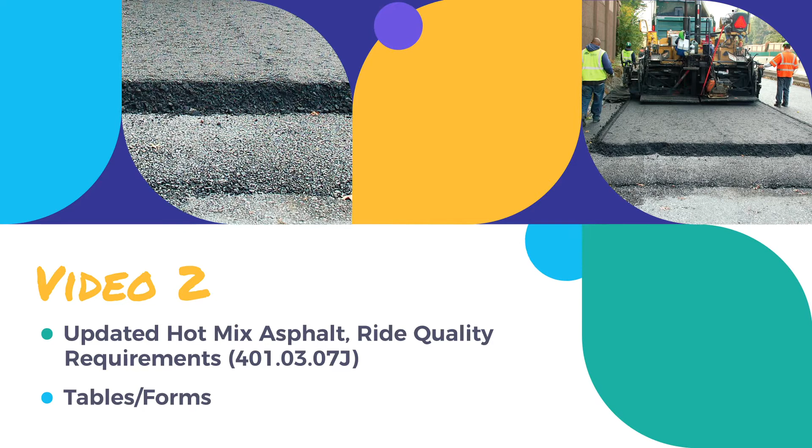In 2019, NJDOT released updated specifications for special provisions for state aid projects. This video series will review changes made to Section 401, Hot Mix Asphalt Courses. This second video in the series reviews the changes to Specification 401-03-07J Ride Quality Requirements. This specification outlines requirements and testing for the ride quality of hot mix asphalt pavement.

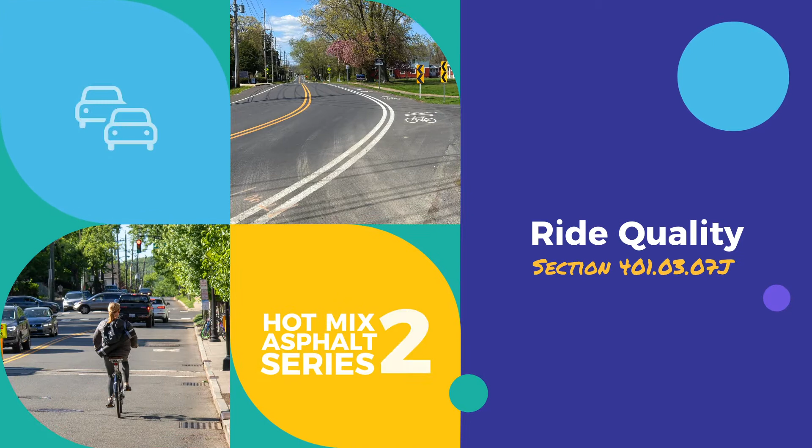The International Roughness Index, or IRI, is used to evaluate the ride quality of the pavement on National Highway System, or NHS, and NJDOT routes. This is in accordance with the American Society of Testing and Materials, Method E 1926. Pay Adjustment Equations, or PAE, have been updated.

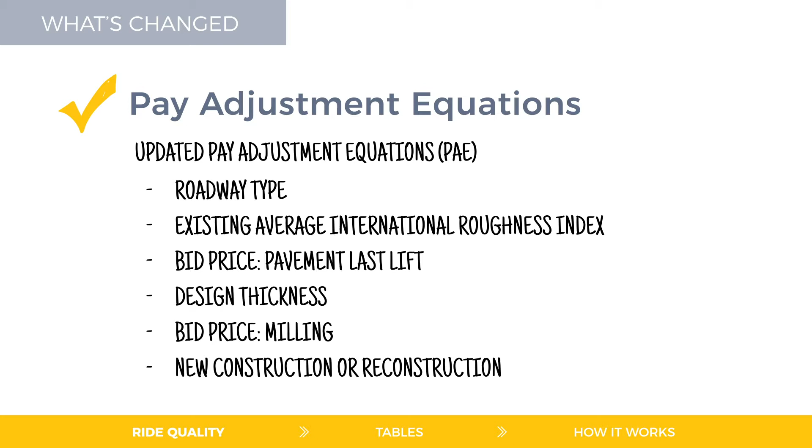PAE factors now include roadway type, existing average international roughness index, the bid price of the last lift of the pavement structure, design thickness, bid price of the milling per square yard, and whether the project is new construction or reconstruction. Any local aid construction project located on NHS or NJDOT highways must comply with all ride quality requirements from the PAE and Target International Roughness Index tables. All NHS roadways are listed on the NJDOT website.

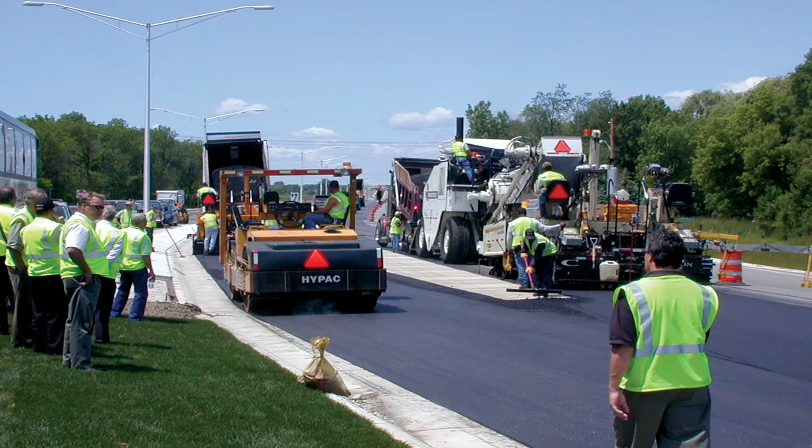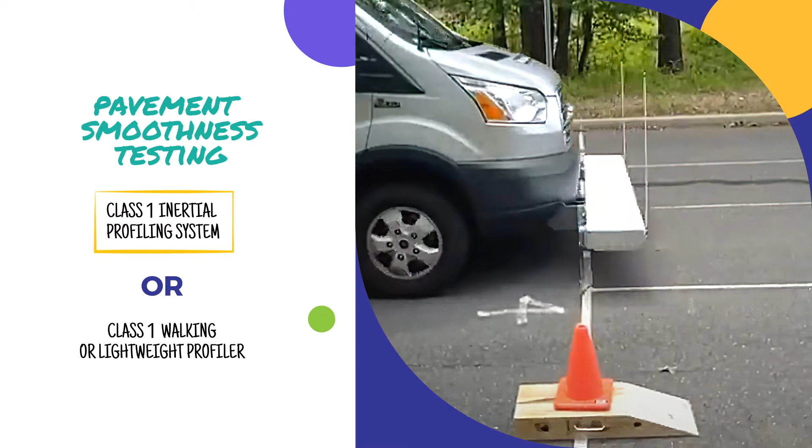15% of a state aid grant can be delegated toward construction inspection and material testing, including IRI testing. The final riding surface is defined as the last lift of pavement structure where traffic will be allowed. Pavement smoothness will be measured by testing the longitudinal profile of the final riding surface with a Class 1 inertial profiling system according to NJDOT R1. If project conditions do not allow for the use of that system, a Class 1 walking profiler or lightweight profiler will be used.

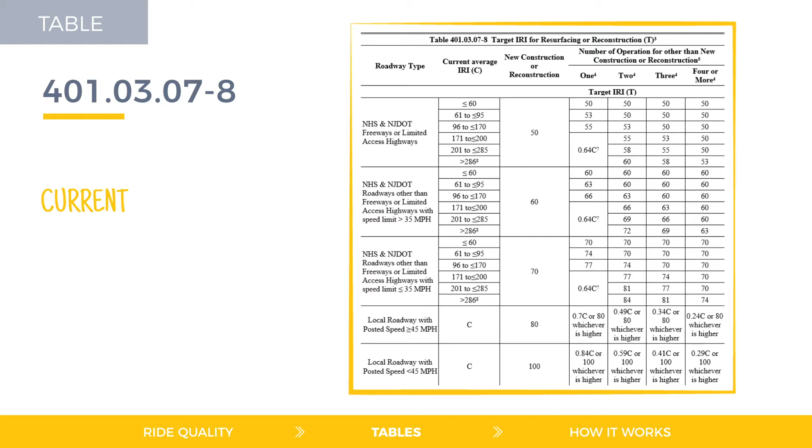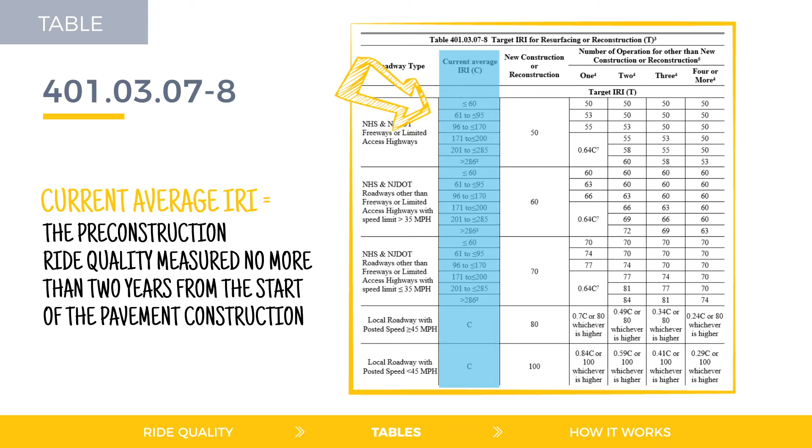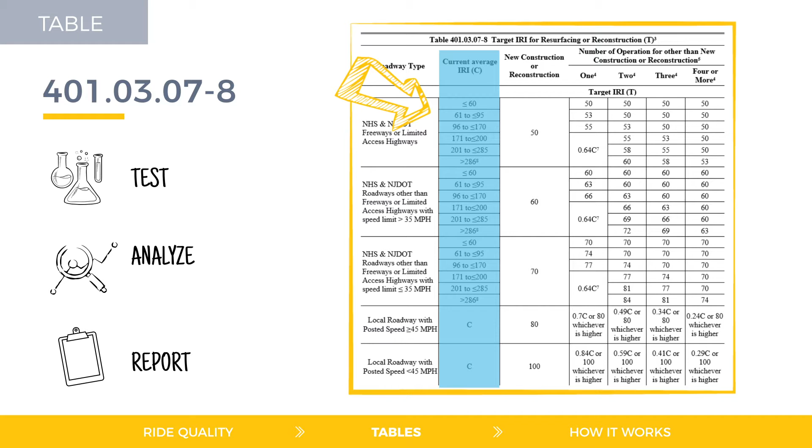The pavement will be evaluated using the current average IRI to select the target IRI from the Target International Roughness Index table. The current average IRI is defined as the pre-construction ride quality measured no more than 2 years from the start of the pavement construction. If the current average IRI is not available, the testing agency will test, analyze, and report ride quality before pavement construction to measure current average IRI. Pre-construction IRI data is available for NHS and NJDOT state highways by contacting the Highway Performance Monitoring System Unit.

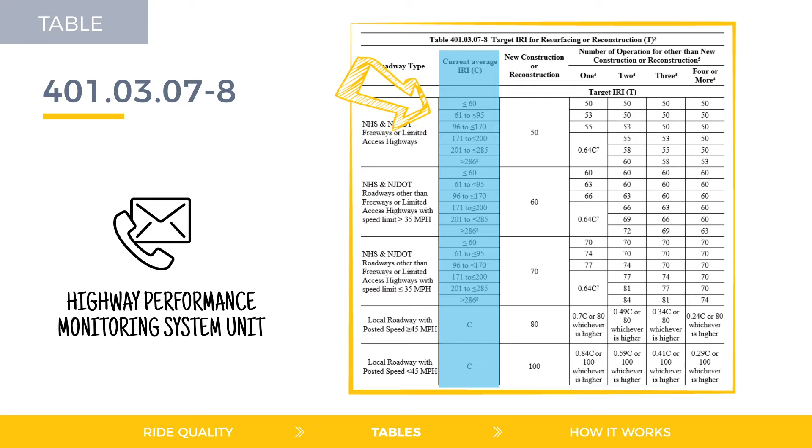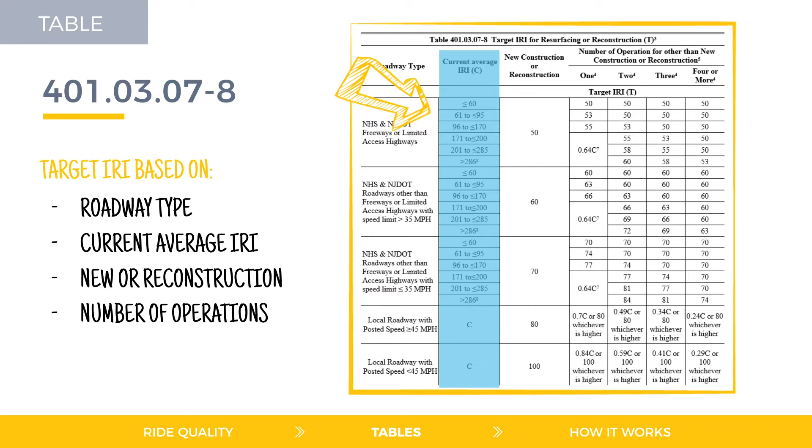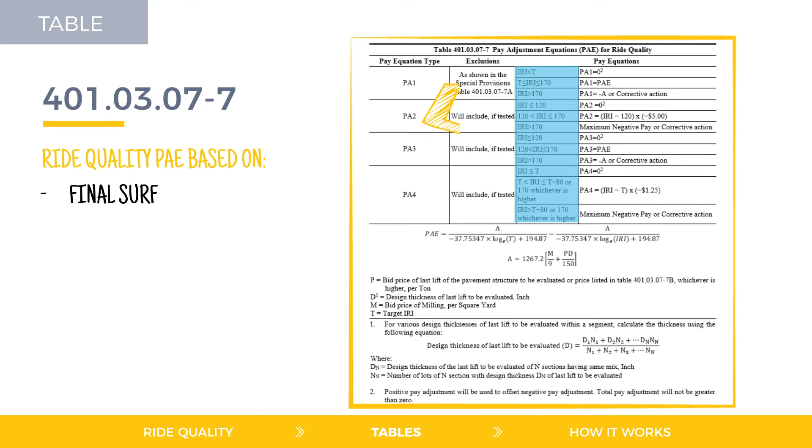Target IRI is based on roadway type, current average IRI, whether the project is new construction or reconstruction, and the number of operations. The maximum target IRI for NHS and NJDOT state highways is 84. Quality control testing should be performed during hot mix asphalt placement to ensure compliance with all ride quality requirements. Ride quality PAE are based on the final surface IRI measurement, target IRI, the bid price of the last lift of the pavement structure, the design thickness, and the bid price of the milling per square yard.

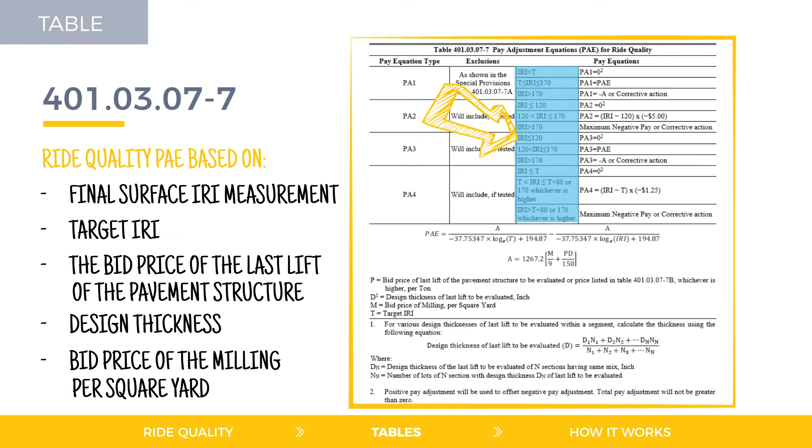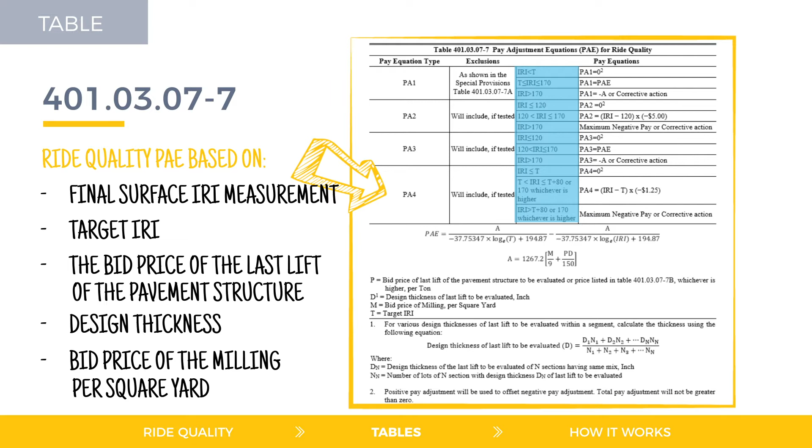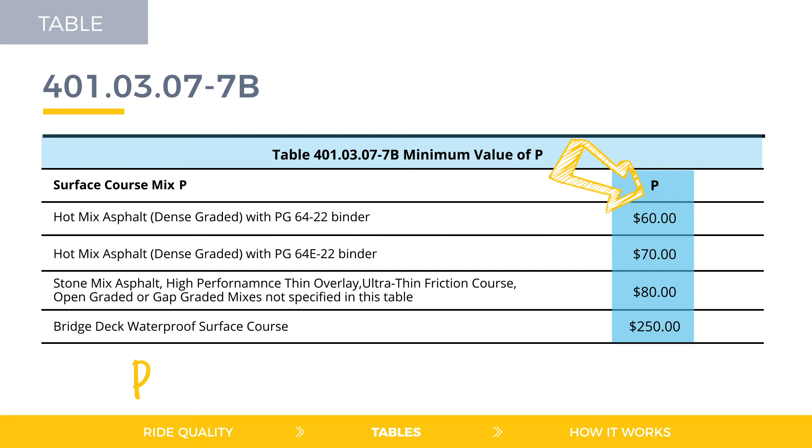The pay adjustments occur when the post-construction IRI is greater than the target IRI in PA1 and PA4 and greater than 120 inches per mile in PA2 and PA3. Table 401.03.07-7B gives the minimum value of the variable P, which is used in the pay adjustment equations. P is the bid price of the last lift of the pavement structure or the price listed in the table, whichever is higher per ton.

Different types of evaluation and PAEs apply to different projects on different types of roadways. In some situations, a visual inspection is enough, but in others, the measured IRI is necessary. If the municipality or county's field representative determines that the work may not conform to the ride quality requirements, the ride quality of the final riding surface will be evaluated using IRI. Visual inspection by the field representative is considered sufficient grounds for this evaluation.

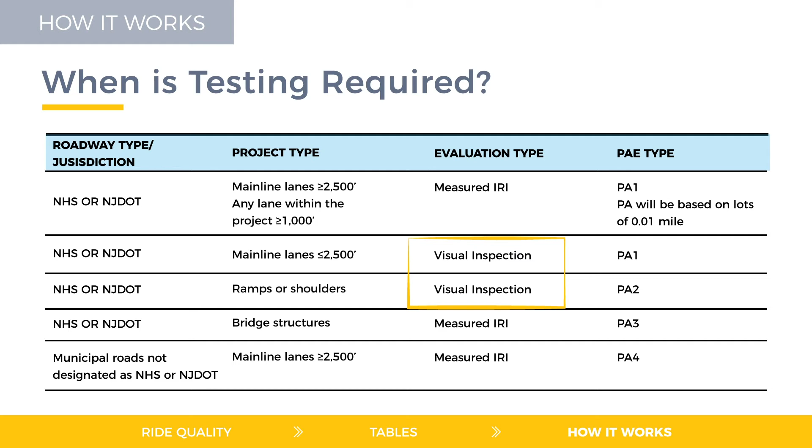There are three basic aspects to ride quality testing: preparation, quality acceptance by NJDOT, and, if necessary, corrective action. To prepare for IRI testing, notify the municipality or county's field representative when paving is complete. The field representative will request testing by an independent testing agency. Mechanically sweep the surface before testing and prepare the pavement.

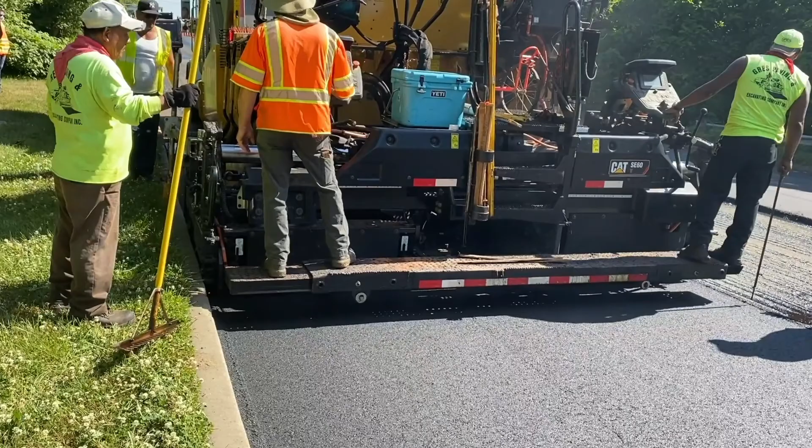To facilitate auto-triggering on laser profilers, place a single line of temporary pavement marking tape perpendicular to the roadway baseline at the beginning and end of each lane, shoulder, and ramp to be tested, or as directed by the testing agency. Submit the actual stationing of each temporary marking location to the field representative. The acceptable IRI for the pavement will be the target IRI from the target IRI table rounded to the nearest whole number, using the latest current average IRI data.

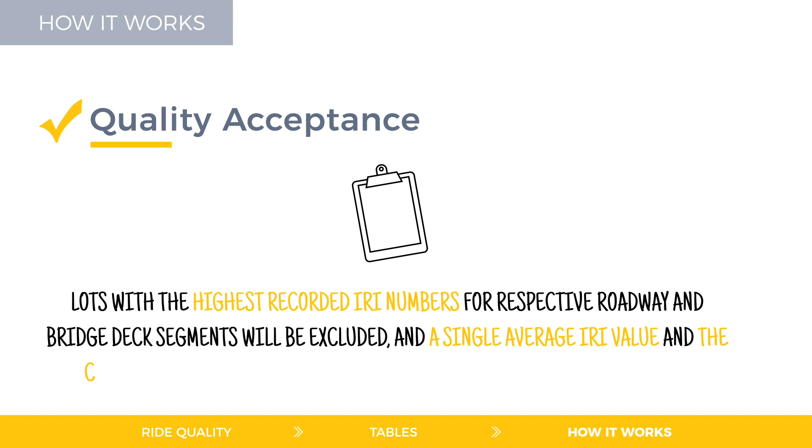The number of lots for final pay adjustment will be reduced by the number of lots excluded for each segment shown in the PAE table. Lots with the highest recorded IRI numbers for respective roadway and bridge deck segments will be excluded, and a single average IRI value and the corresponding pay adjustment for each 100th mile lot will be reported.

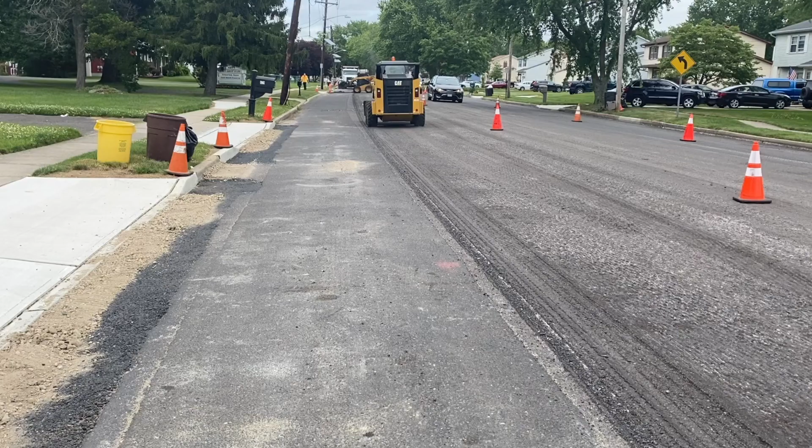If NJDOT does not accept the ride quality test, a corrective action plan must be submitted and approved by the District Local Aid Office before any corrective actions can take place. If the plan is not approved, NJDOT may require removal and replacement. The new work must meet the same requirements as the initial work.

To learn more about the other changes made in the 2019 update, be sure to check out the other two videos in this series. For more resources and information on the updated special provisions, you can visit the NJDOT Local Aid Resource Center or the NJDOT website.